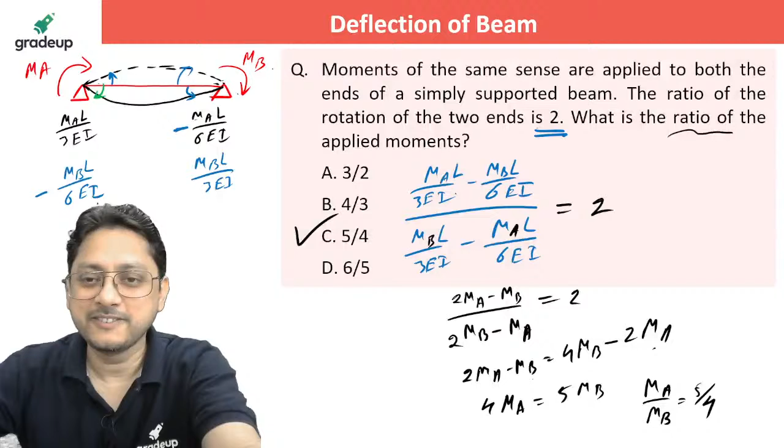What about this one? An overhanging beam of uniform EI is loaded as shown below. This one I think is quite easy, right? The deflection at free end is asked - what will be the deflection at the free end here? Can you do this one? This is very easy, very easy. Several times you would have seen how to approach this, isn't it?

Take me red color. Okay, how will I do this one? The deflection of the free end - what is the approach you are going to apply here?

Samrat is saying the semester exam was going on. Semester exam is finished now, is it? So many places semester examination was going on, right? Now you can do the preparation full-fledged, right? And how was that, how was your examination? Please don't say that, sir. I was too busy in the preparation and my semester exam was not that good. Please.

Okay, you have got the answer C. Santu is saying once again it is D. So let me solve this one. It is D, I don't know, I have just not calculated yet. So suppose, see, you have to help me. You need to help me.

So whenever you are solving it, remember that the principle of superposition will apply. Method of superposition will apply here. One should understand that if this is L and this is L by 2, there are two types of deflection you will be getting here. If you apply the load here, you can understand due to the load and the distance.

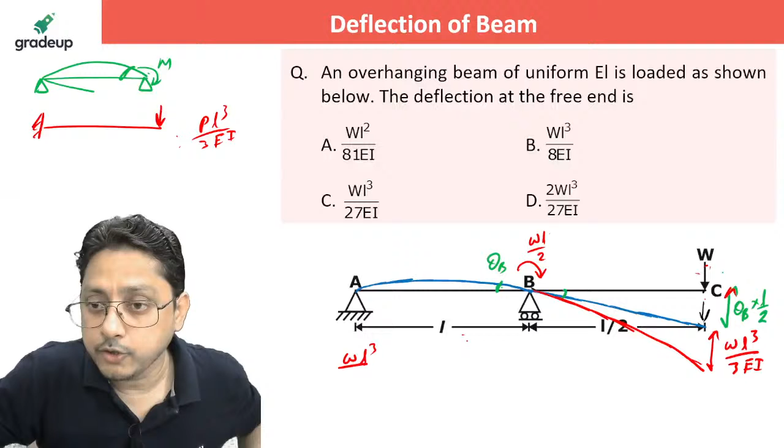And you need to understand that WL cube by 3EI, here L is L by 2, so W into L by 2 cube by 3EI, plus theta B, which is nothing but ML by 3EI. M is already what? M is WL by 2. L, what is L? L divided by 3EI into L by 2. Now you tell me how much you are getting it here.

Can you tell me? WL cube by 24EI, and plus, WL cube divided by how much you'll get? 2, 4, 4, 12. Correct, no? Any mistake I'm doing?

Now add these two, that's all. 24 here add, 24 of 24, 12 twice 24, 2 1 3, 3 WL cube by 24, so WL cube by 8EI. Simple. WL cube by 8EI. What about this one?

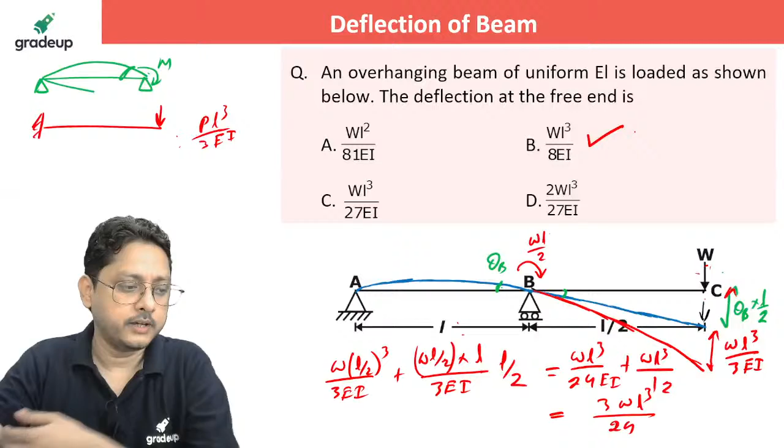The free end deflection of a cantilever of length L with a couple M acting at its mid. So you have a cantilever and a couple is acting, that is M acting at mid of the cantilever span. Now what is the deflection at free end? Can you tell me?

Very simple. Now you already know that for a cantilever, at a free end, if moment is applied, what is the theta? That is, if suppose this is A and this is B, it all depends. If you're applying the method of superposition, you want to remember the theta and deflection for the standard cases, isn't it? Now theta at B, what is the value? That is ML by EI, correct?

And what is the delta for that? That is ML square by 2EI. Is it correct? ML square by 2EI. Now use that theta and that delta value to get that. It is very simple.

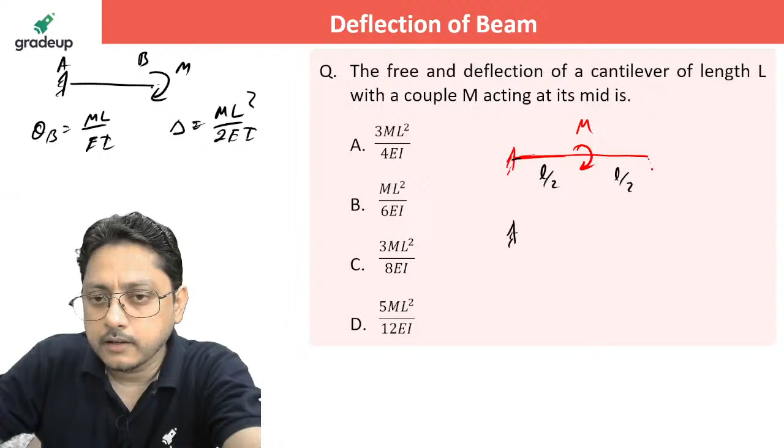Can you do this? Now, due to this moment, if this is L by 2, this is L by 2, here your beam is this, and it is going to get deflect till this point. So you will get one deflection due to the moment applied here. This amounts to ML square by 2EI. So that is ML by 2 square by 2EI.

That is your deflection here, and there is a rotation. This rotation is simply theta, whatever you have here, that theta multiplied by length. So this will be ML by 2 by EI multiplied by R theta, right? Theta we have already done. What is R? That is L by 2 once again. Now can you just add these two? How much you'll be getting it here?

ML square by 2, 4, 8, 8EI, and then plus ML square by 2, 4, ML square by 4EI. Am I correct? You take 8 here, I take 3 by 8 ML square by EI. So you have answer C.

How many of you have given the correct answer? Ashish, Kavya, and Samrita - all of you are giving the correct answer, isn't it? Now what about the other one?

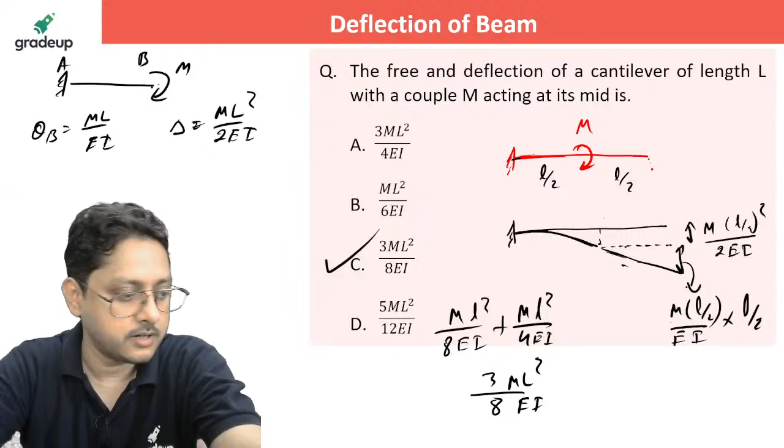A simple beam of span L carries two equal unlike couples M at the two ends. The central deflection of the beam, EI being constant, is given by. You just find out the central deflection. There is some statement mistake here. What is the central deflection? How you solve this one?

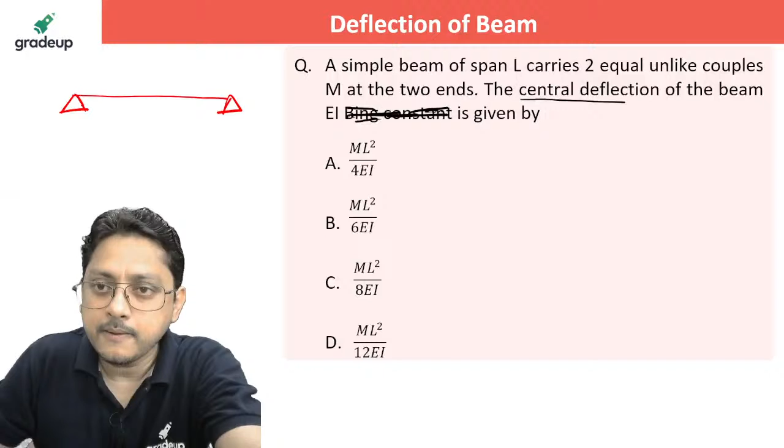You have a simple beam, that is a simply supported beam, and two equal unlike couples are acting at the two ends. It means here if you have a clockwise, then here you have an anti-clockwise. So it means both of them will produce the same type of deflection, isn't it? Now what will happen? Your beam is going to get deflected like this.

As this is a symmetrical picture, one can understand the deflection maximum will be at the center due to the symmetricity. So in other way I can say that theta, the dy by dx, or theta at mid will be 0. Agree or not? The slope at mid of the beam will be 0 because it is a symmetric one and maximum deflection will be occurring here.

Which one is the correct answer here? Can you tell me? Now simply if I am applying moment area theorem, can you draw the bending moment diagram for this one? So bending moment diagram, if you draw, what you will get here? Can you tell me? You will get a rectangle with M and M.

Now if I say draw the M by EI diagram, if the beam has a constant EI - that is what he was supposed to write down, EI is constant for the beam - what will be the M by EI diagram? The M by EI diagram will be like this. This will be your M by EI diagram. Now, once you got the M by EI diagram, how you will get...

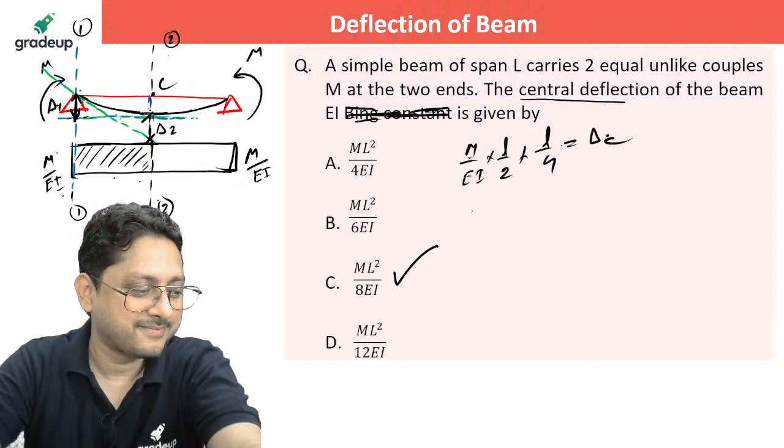How will you do this one?

Once again, whenever you have a cantilever beam, moment area theorem is a very nice method. Either you can use moment area theorem or conjugate beam method. I don't mind which one you use, both are fine for me.

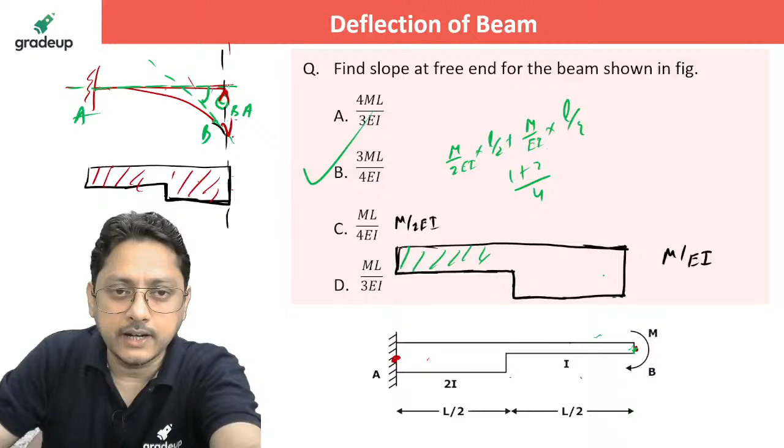Remember, for the cantilever portion you don't have to worry much - generally the vertical intercept will be at the free end only. There are choices for simply supported and other beams, but for a cantilever beam, generally you need to stand at the free end. If you take the moment of this whole area about that position, you will get the vertical distance between the two tangents drawn at A and B, which is the vertical intercept.

Now find the deflection at A. What is the vertical deflection at A here? How will you calculate this one? Can you do this? What is the vertical deflection at A?

How will you do this one? Here also, you need to understand that due to the applied load, consider this length as L. Due to the load P into L, there is a moment applied here, and due to that moment, your member CB will be deflected like this.

Just a moment, I'll create a diagram here. This is your deflected portion of CB. Now due to this rotation of the joint, member BA—imagine if member BA doesn't have any load, what will happen? It will simply rotate due to the rotation of the joint B. If joint B rotates, the member BA also will rotate.

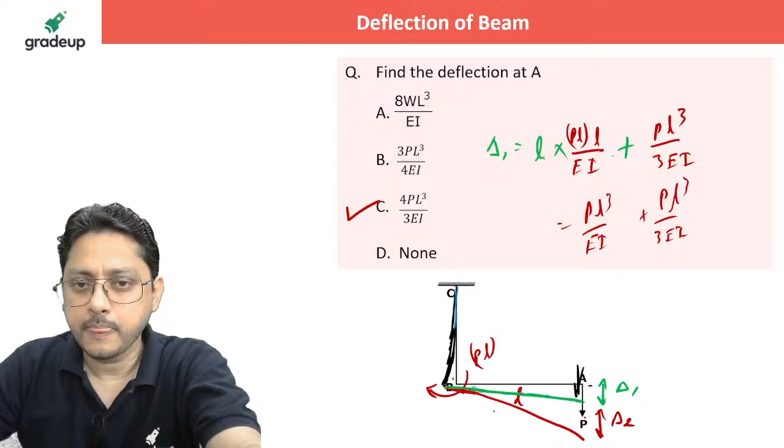Yes, absolutely, Santu and Kavya. Are you able to understand this, how to do that problem? If you have any doubt, please let me know. Is it clear?

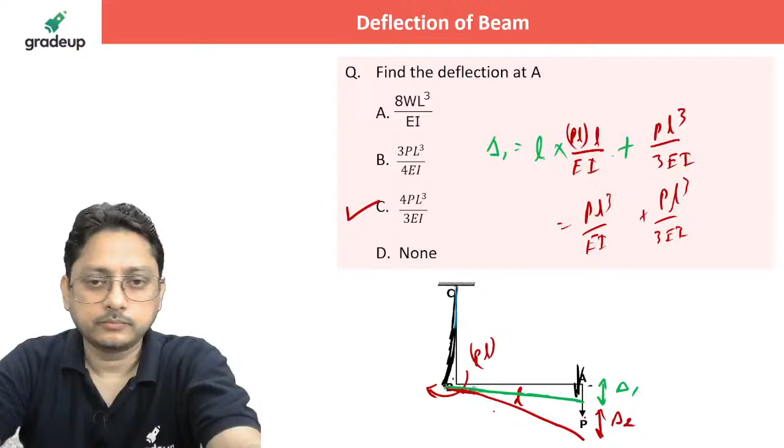Now see another one: a cantilever beam ACB has end A. This is the scenario. How will you do this one? Now the scene is only different here — the deflection is asked at the free end. Earlier I provided one moment here, but instead here we have a load applied, a concentrated load applied.

Now you have a change in section, so use the moment area theorem. If he's asking the deflection at this point, you can also utilize the conjugate beam method, no problem. Suppose you want to use the moment area theorem — how will it look? Can you do this one? So draw the bending moment diagram, and from there I'll write the M by EI diagram. For a cantilever with load applied here, it is a hogging one, so negative P into the total length — that PL is the total bending moment, negative, and it is a linear one.

Now if you are dividing the bending moment diagram by EI, how will it look like? What is the bending moment at this location? That is P into L by 2. This height is nothing but P into L by 2. If you divide it by EI, it will become PL by 2EI, isn't it?

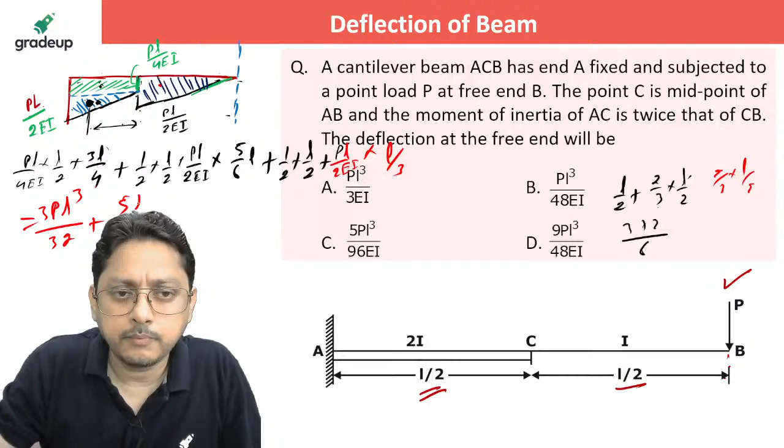This is 3 PL cube by... right, plus this is 5 PL cube by 96. Just a minute, are you able to see what I'm writing? And then plus, how much are you having here, half of PL cube by, here you don't have anything, so it's PL cube by 24 EI.

I think I made some mistake in the calculation. Please correct it. Maybe I've written a mistake somewhere that you need to identify. Half into... you just check the calculation, PL by 4EI. Can you check the calculation once again? We'll check it. Otherwise, if I find it, then it's okay, otherwise I'll skip it and go to some other question.

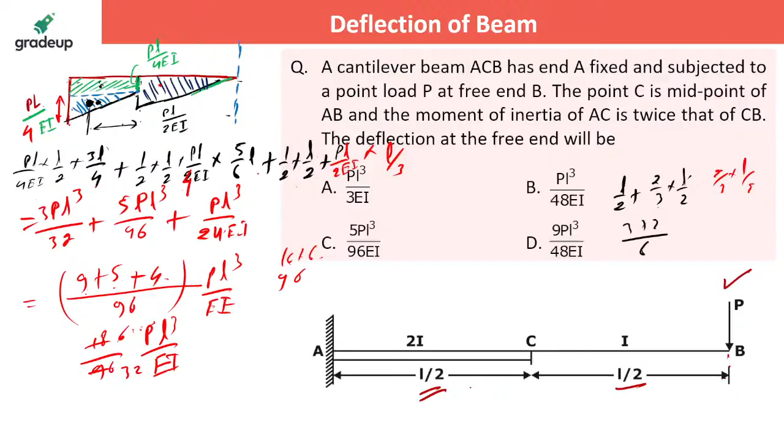18 by 96, 18 by 96, PL cube by 3EI. PL cube by EI, I think still you just calculated, some calculation mistake has been done. Can you calculate this one? Sometimes if you do the mistake in the calculation, it's a bit difficult to identify.

What is the horizontal deflection at free end C of the frame shown in the given figure? If you'll find time, I'll check the calculation once again. But meanwhile, can you do this one? The horizontal displacement deflection at the free end C, he's asking. What is the free end C? This is your free end C. This is actually a tricky one.

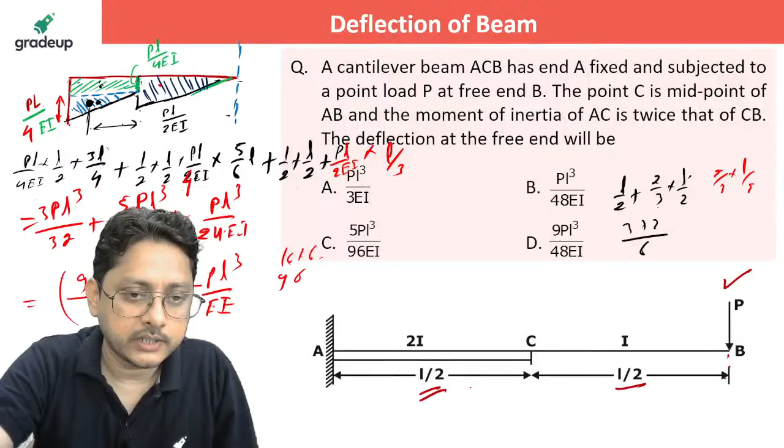How? Oh, 18 by 96 you are saying, okay. You are saying 9 by 8, 4, 12. Then it will reduce further, 3, 3, 9, 2, 3, 6, and 16, how much will it be? 3, 3, 9 and 16, 3, 48, 3 by 16. You will get 3 by 16. Yes.

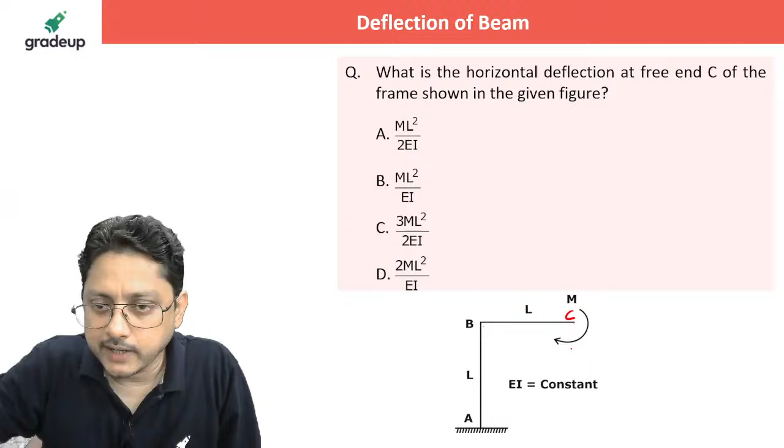What is the horizontal? See, this is quite easy and tricky also. If you will apply the moment here, see, whatever deflection you are getting at C, he is actually not asking the vertical one. Please understand he's asking what is the horizontal deflection. Horizontal deflection means what? This moment will actually produce what it will do here. This member AB due to this moment will come here, and due to that only, whatever the horizontal displacement at C will be happening, that is only due to the moment acting on member AB. That BC will get bent, but that bending is not going to create any trouble, right? Bending will produce only vertical displacement. So horizontal displacement is nothing but the displacement.

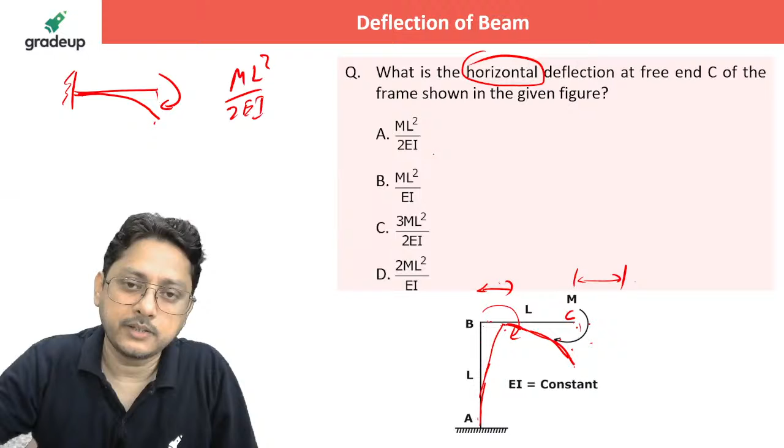So now one can identify, if you have a moment applied here, what is the deflection here? That is ML square by 2EI, that's all. What is the value of M? That's simply ML square by 2EI. Answer will be A. Are you able to understand that?

A 4 meter long hollow alloy tube with inside and outside diameter of 36 mm and 48 mm respectively, elongates by 3 mm under a tensile force of 50 kN. Determine the buckling load for the tube when it is used as a column with both ends pinned and with a factor of safety 5. I think this is from the column chapter.

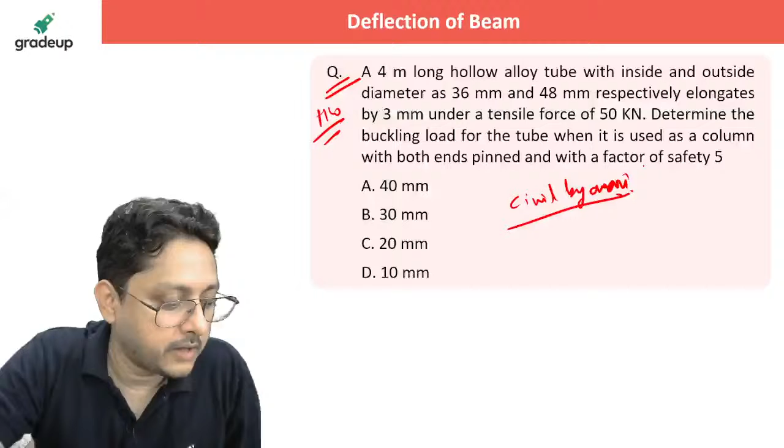It has been coming here. You just solve it, take it as homework. Solve it and give the answer in my Telegram channel, Civil by Ansari Sir. Civil by Ansari Sir, right? I was actually supposed to ask day before yesterday for the column, this nice question. Solve it, ask. Then if you have any doubt, please let me know on my channel.

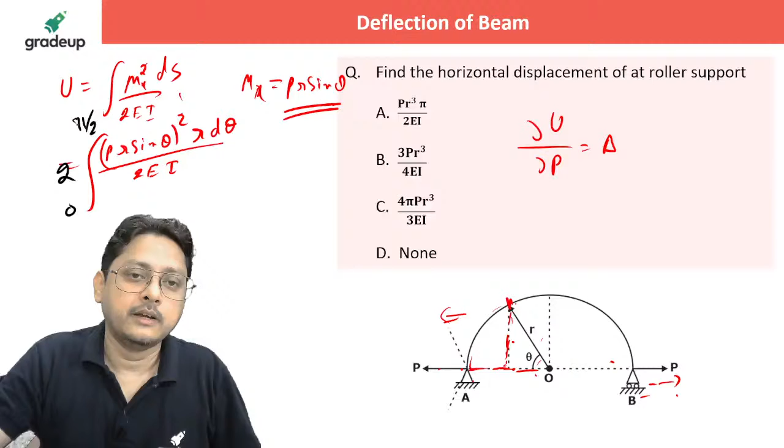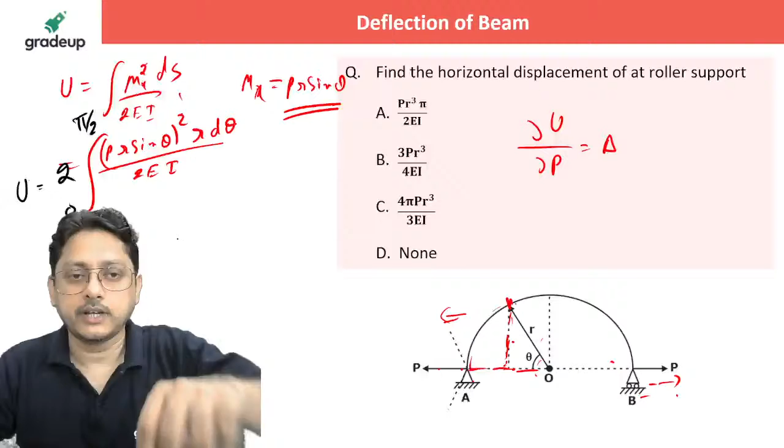Multiply and integrate from 0 to pi by 2. Now you integrate it, and how much are you getting? That's all, this is your strain energy. Find out the strain energy here. How much will you be getting?

The strain energy: take all other components, 2 will get cancelled. I think I should not carry on fully. So then r square, p square and r cube, p square r cube, and sine square theta is the only quantity which you have now, with d theta, integrating from 0 to pi by 2.

Now if you integrate it, how much are you going to get? If you integrate, you will get pi by 4. Can you just do that? So you will get p square r cube, sorry, EI is also there, p square r cube by EI into pi by 4. Now this is your strain energy.

Partially differentiate with respect to p to get the delta, that del U by del P, using Castigliano's theorem. What you'll get again is 2 p r cube pi by 4 EI, and finally you'll get p r cube pi by 2EI. That's all, that is the horizontal displacement of the joint or point B, the horizontal displacement of the roller support. Did you get that? Practice it.